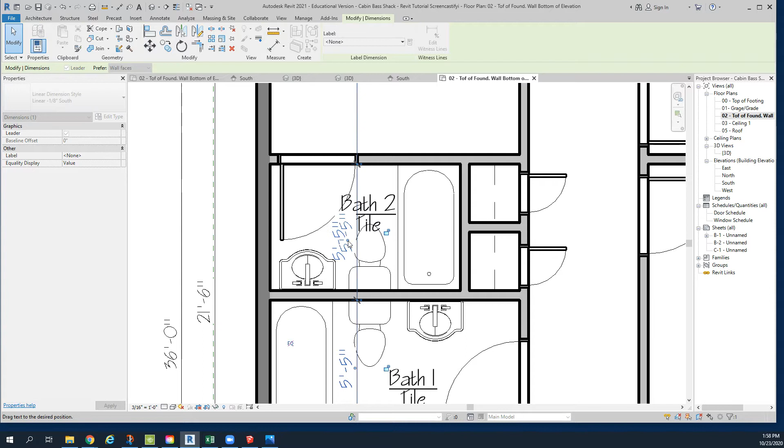When I go back and place my dimensions, we want to try to move this into a spot where we can find it without ruining everything. That 14'4" looks good there. 5'5" here. This one is just a little bit crumpled, a little bit chaotic. So we're going to move that by grabbing it there. And here, to clean this up, why don't we just move this over just a little bit. That looks nice and clean. So we've got a run of dimensions there.

We'll go across the top now. We always start on the outside, then go to the inside of this wall, the inside of that wall, to the inside of that wall, and then right back to the outside. I'm going to try to find a little bit of a run in here. That looks pretty good right at the top. The last click sets it from the outside to the outside. There we are as our dimensions.

Looks pretty good. We know that this is already 2 feet. We'll come back and dimension that later on.

Now we're going to come down the side here. We're going to go from here, to this part, and then all the way back to the outside. And again, we're looking for a little clean area that we can put that in. That came out pretty well. That came out pretty good as well. So it goes from the outside down to here.

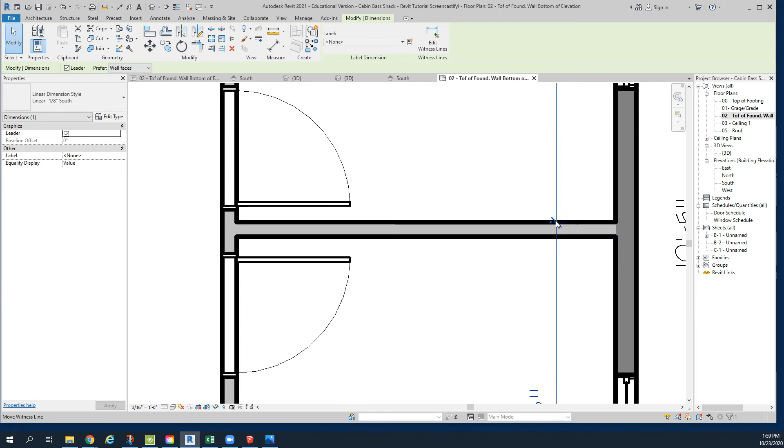Notice that this is just a little bit different, and that's okay—this is 10'11". If I needed to move this so that those matched up, all I do is grab this and drag that dimension down, and now those are both 10'11". Things are matching up pretty well.

All right, there's really nothing to do across going this way. Now we need just a few other dimensions. We need a dimension down here for the countertop. We always want to tell them the thickness of the countertop.

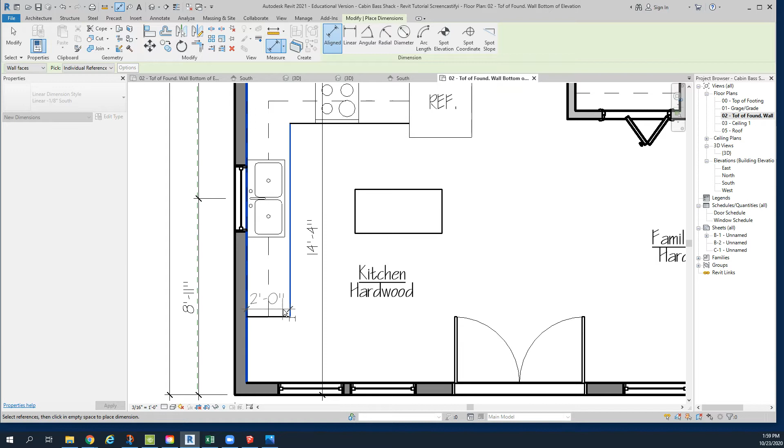Didn't catch that—so these are all going to be individual references. You can put that right here. I'm also going to tell them where the countertop ends, that's at 3 foot. All right, we need to know how much space is around this island, so we'll put it right there at the corner and where this is coming from here.

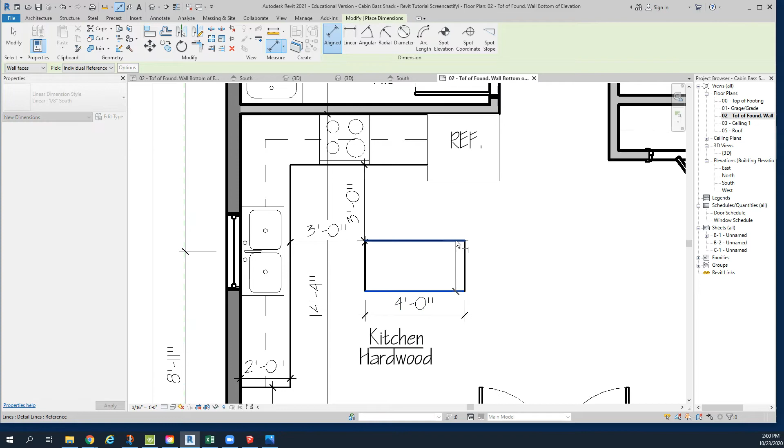Okay, and then what is the width and depth of this island? The width of this island is exactly 4 feet, and the depth of it is exactly 2 feet. Those are a couple things that we need.

We'd like to know the distance of the closets. We're going to place that in there. That should not be 1 foot, that should be 2 foot. So I'm seeing a mistake in my drawing here, and I'm going to go ahead and fix it—it should be a 2 foot closet.

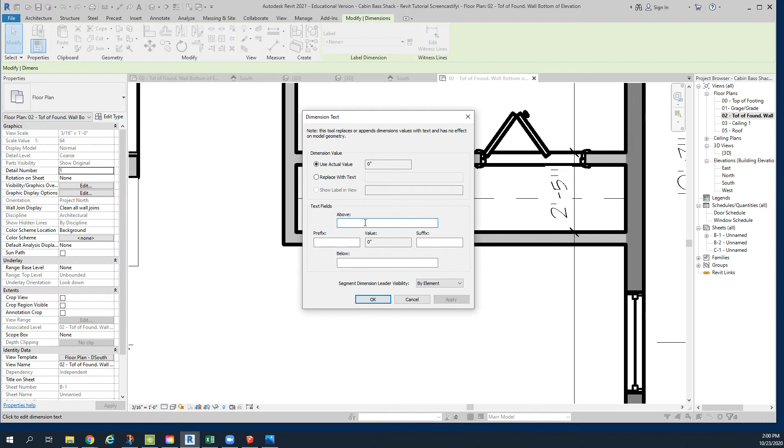I'm going to double click on here, and I am going to type in TYP, TYP period, because we want to say that all closets are typically 2 foot. All right, so there's the depth. We don't need to do the rest of these closets.

I do need to know what the distance is here, and then how far over this wall comes. Well, since this is a main wall, we don't have to identify that. That's just a long run, but I didn't get any dimensions there—we would not know where these are. So we're going to go from here and then back over to there.

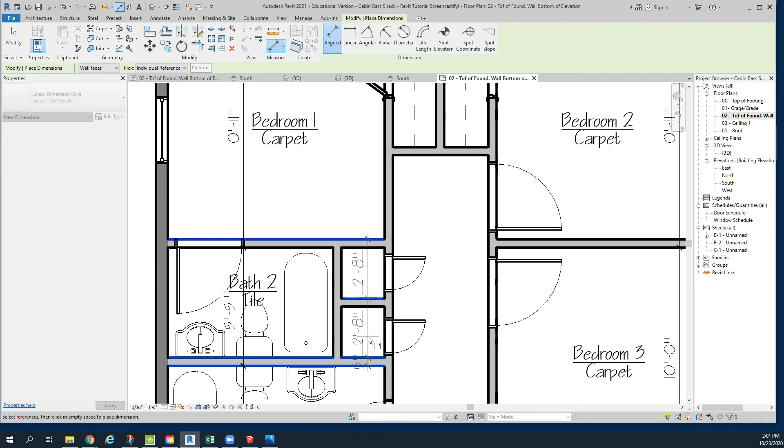And you can see there, I made a little bit of a mistake—I got a dimension I didn't want. So I'm going to right click on it and say delete that dimension, delete that witness line, and that line goes away. All right, we know that these are 2 foot in here.

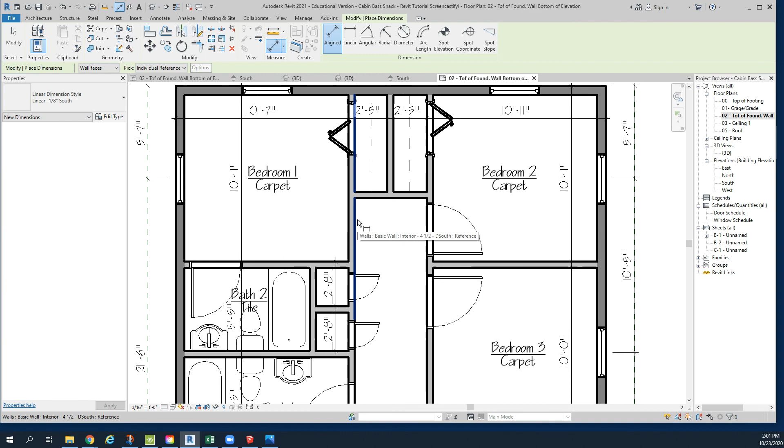We could probably just give a width of this hallway, and I would say that's probably pretty good. We know where this goes here, but this hallway, just to keep everybody on the same page, is 4'5".

All right, I'm zooming out. It appears to me that all of the general dimensions—if I was to click on a wall like this, would I know where to locate it? Yes, it's 10 foot 11 going that way.

If I was to click on this wall, would I know where to locate it? Yes, there's a dimension there. We want to just kind of take one look at it. Things look to be pretty clean, and there are interior dimensions—1, 2, 3 runs. Unnecessary to have a run right here.

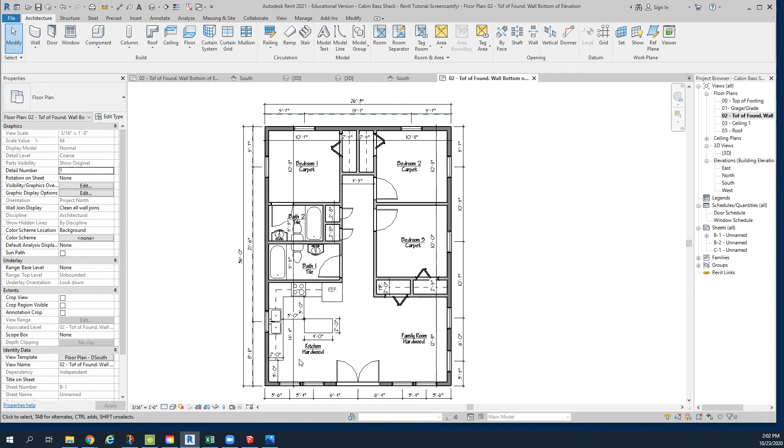Your interior dimensions are complete. Congratulations.